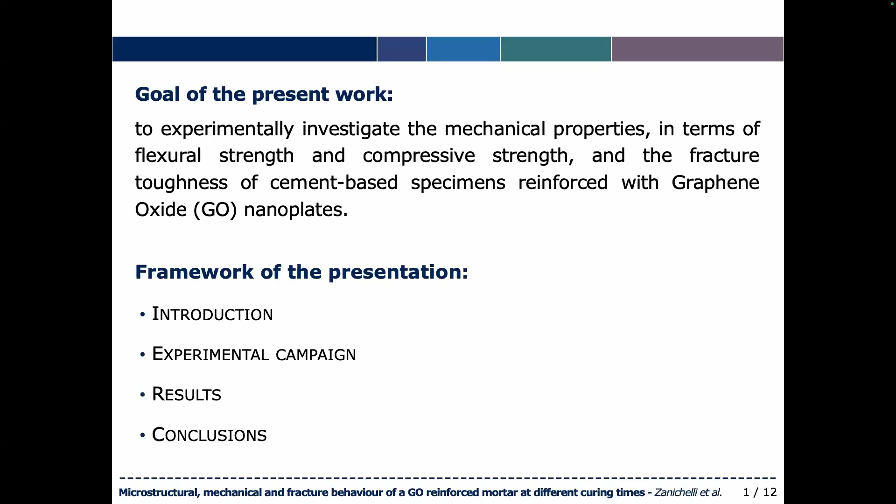So, cement-based materials, that is cement and mortar, are the most used construction materials all over the world, and this is mainly due to their low production cost, of course, and the high versatility in response to the design requirements. But despite the many desirable features, the main disadvantages of such materials are represented by the low crack resistance capability, that is to say a low fracture toughness, and the presence of intrinsic defects.

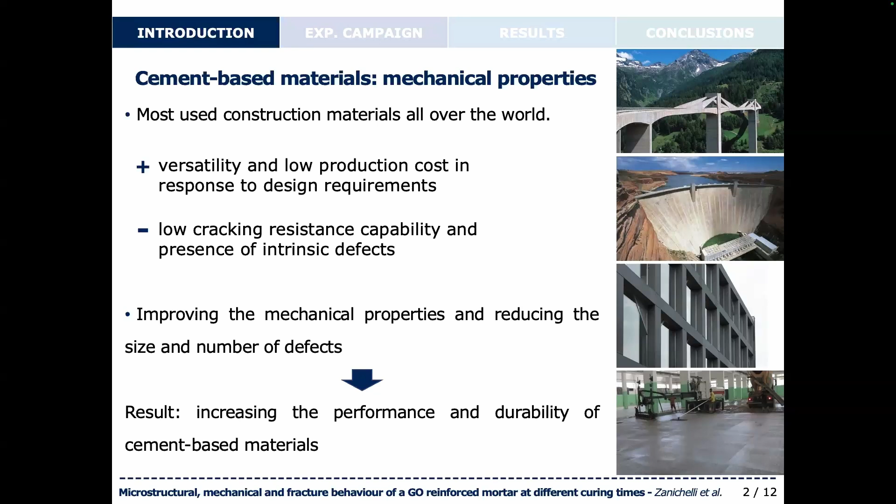So improving the mechanical properties and reducing the size and number of defects may result in the increase in the performance and durability of such materials. And an effective way to enhance the mechanical performance of such materials is obtained by adding nanomaterials into the cement-based matrix. And among nanomaterials, graphite or graphene-derived materials, such as GO, represent reinforcing bidimensional nanofillers in the form of nanoplates, which are able to improve the macroscopic properties of cementitious materials due to their excellent physical and chemical properties.

As a matter of fact, according to the technical literature, GO nanoplates can regulate the microstructure of the hydration crystals during the cement hydration phase, and so leading to an increase in the mechanical strength and in the fracture toughness of GO-reinforced cementitious composites.

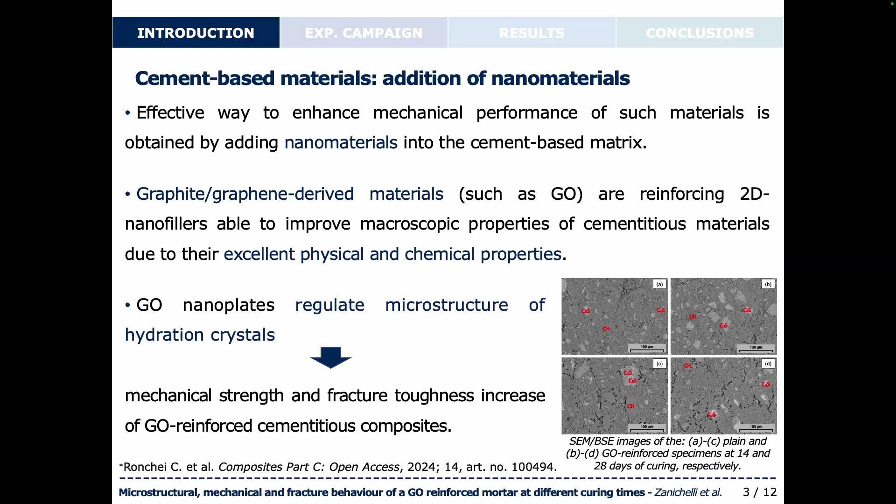Now, let me describe to you the experimental campaign we carried out at the testing laboratory of the University of Parma. So, in particular, the raw materials employed for the preparation of the GO-reinforced mortar specimens were the Portland cement, a standard silica sand, a polycarboxylate superplasticizer that is named PC, and the graphite powder. Then the GO in aqueous solution was obtained from the oxidation of the graphite powder by means of Brodie's method.

And then the mixture proportions employed to cast the GO-reinforced specimens are listed in the first line of the first table, here, by weight of cement. Then we also cast the plain mortar specimens, that are the PM specimens, with the same proportions of cement, sand, water, and PC.

And note that the proportions shown in the first table are those used to cast the specimens to be subjected to the mechanical and fracture tests, whereas the sand was not considered for casting the specimens for microstructural analysis, both GO-reinforced specimens and plain mortar specimens, named GO* and PM*, since the presence of sand could make difficult the interpretation of the results from a mineralogical point of view.

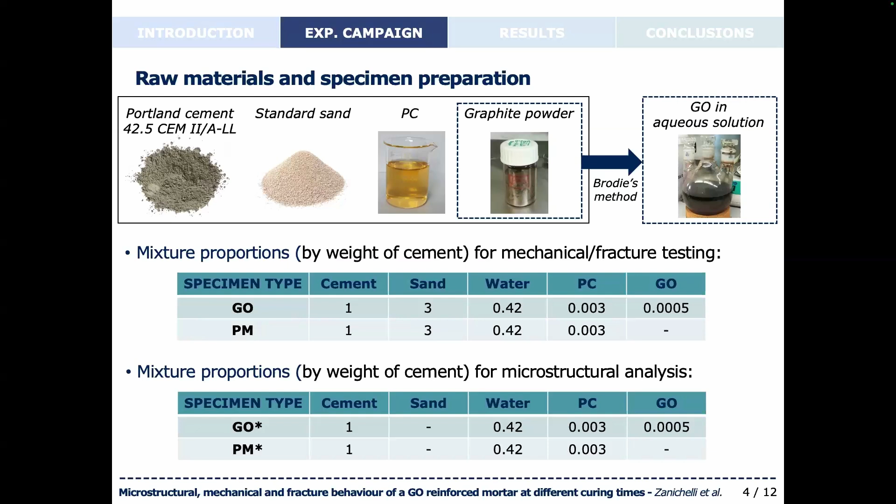So, as far as the mechanical tests are concerned, flexural tests, compression tests, and fracture toughness tests have been carried out for both plain mortar specimens and GO-reinforced specimens at different curing times. In particular, for each curing time considered, 3 prismatic specimens with the nominal geometrical sizes shown here have been subjected to 3-point bending tests in order to determine the flexural strength.

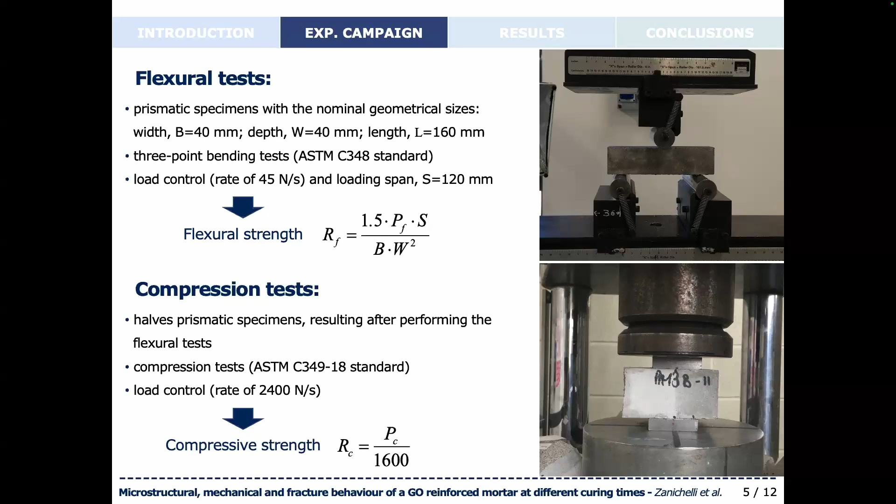Then the 6 half prismatic specimens resulting after performing the flexural tests were subjected to compression tests in order to determine the compressive strength. Moreover, 4 prismatic specimens with the nominal geometrical sizes shown here in the top and with a notch in the lower part of the middle cross section have been subjected to 3-point bending tests in order to determine both the elastic modulus and the fracture toughness by means of the modified 2-parameter model.

Well, such a model, proposed by Vantadori and co-workers, allows us to take into account the possible crack deflection during the stable crack propagation phase, even in the case of a remote pure mode 1 loading applied to the specimen. So, as you can see in the graph on the bottom right part of the slide, a typical load versus crack mouth opening displacement graph according to the modified 2-parameter model is represented.

Each specimen is monotonically loaded up to the peak load under crack mouth opening displacement control. Then, when it reaches a load value of about 95% of the peak load, the specimen is fully unloaded, and then it is finally reloaded again under crack mouth opening displacement control up to the final failure of the specimen itself.

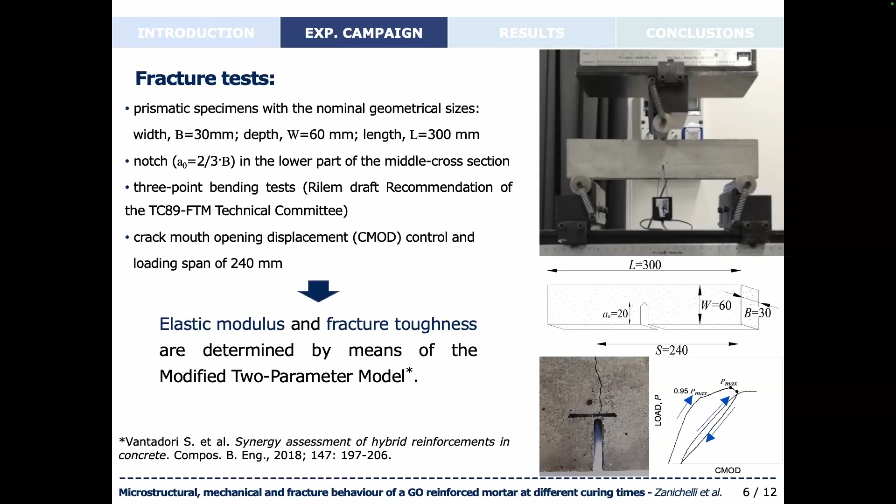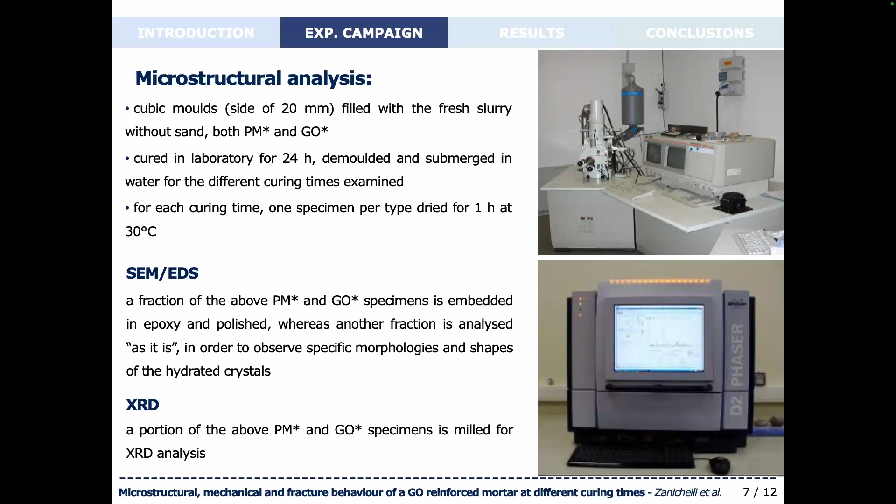Then, as far as the microstructural analysis is concerned, small cubic molds were filled with fresh slurry without sand, that is, as I said before, the PM star and the GO star specimens. Then they were cured in laboratory for 24 hours, demolded and submerged in water for the different curing times we have examined. For each curing time considered, 1 specimen per type was dried for 1 hour at a temperature of 30 degrees, and then divided into 2 portions, one to be subjected to the SEM-EDS analysis, and the other one milled for the XRD analysis.

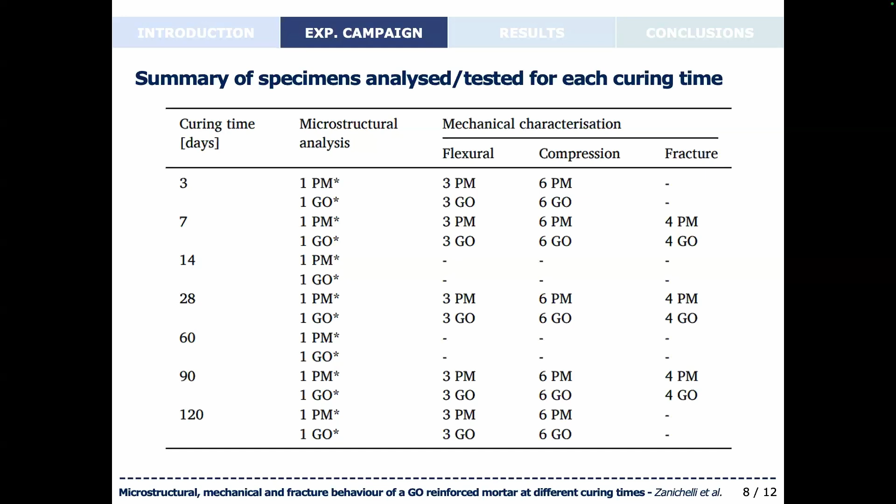In this slide, a summary of all the specimens we considered for both microstructural analysis and mechanical characterization, that is flexural, compression and fracture tests, is shown as a function of the curing times we have considered, that is to say from 3 days up to 120 days. And now let's have a look at the results we have obtained.

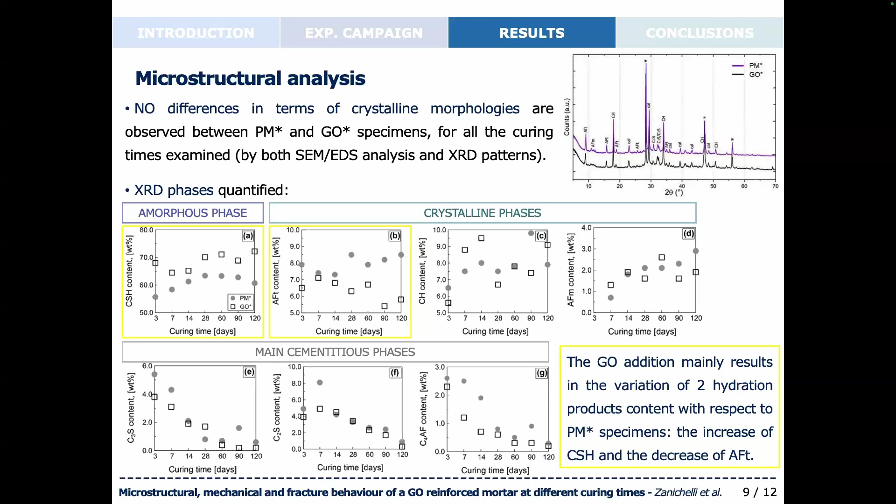So at least for the microstructural analysis, we can conclude that the GO addition mainly results in the variation of two hydration products' content, that is the increase of the amorphous phase and the decrease of the ettringite.

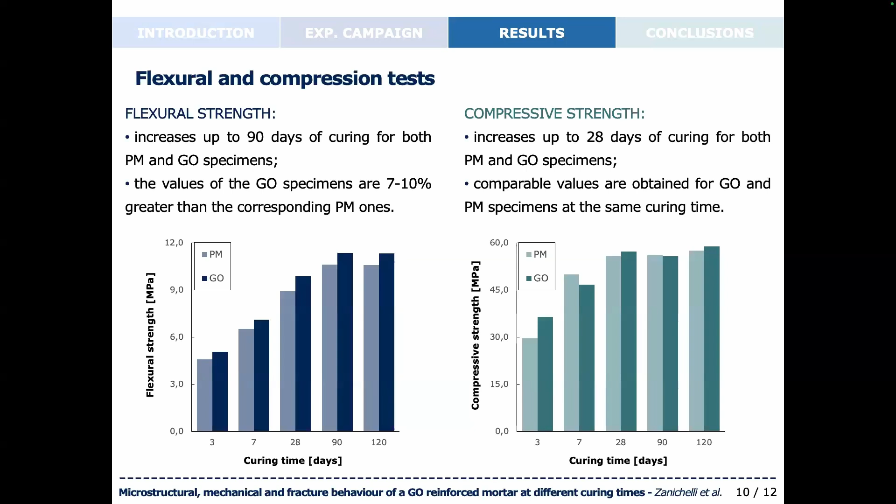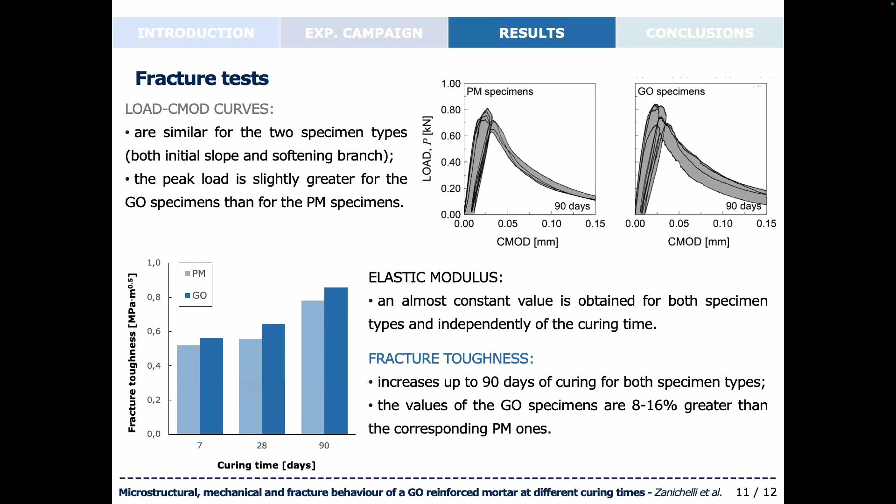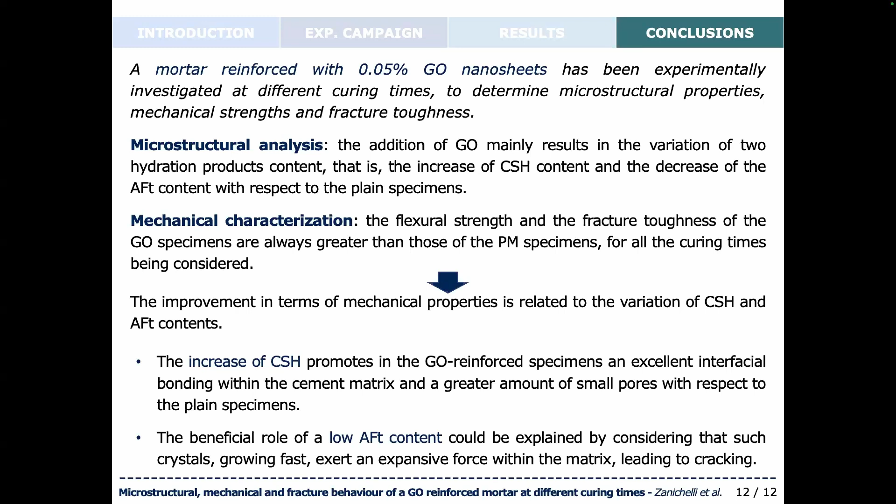In particular, the increase of the amorphous phase promotes in the GO-reinforced specimens an interfacial bonding within the cement matrix and a greater amount of small pores with respect to the PM specimens. Whereas the beneficial role of a low AFt content could be explained by considering the growing mechanism of such crystals that, growing fast, may exert an expansive force within the matrix, leading to cracking. And so a low AFt content would lead to a less damaged cement matrix.